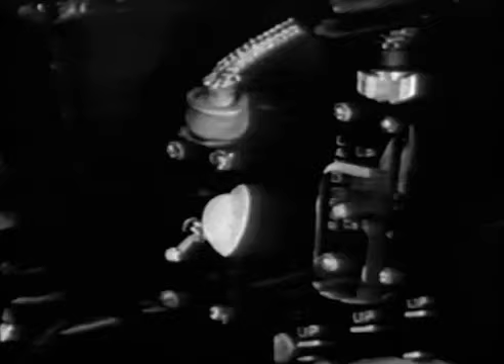The switches for all electrical equipment are on the left side of the instrument panel. Be sure the landing gear switch is not in the up position. Check the gun switches to be sure they're all off before turning on the main battery switch. It's on the right side of the switch panel, and the generator switch is just below it. You might try your flaps to be sure they're working properly.

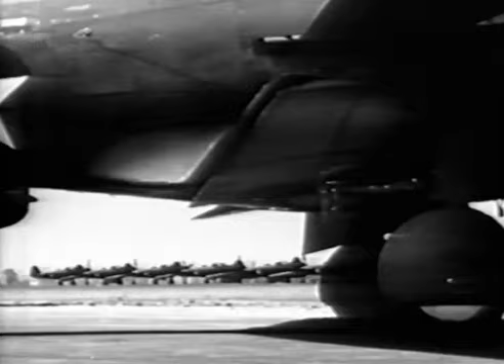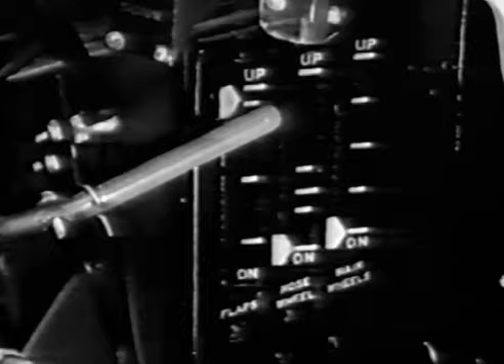The first of the 3 travel indicators is for your flaps. The other 2 are landing gear. Aside from being used in landing, the flaps can also be used to shorten your takeoff run on a small field. For this, 1/4 flap should be used. However, I don't recommend that you use flaps for takeoff until you're more familiar with the plane.

The propeller on this plane is an Aeroproducts propeller, which operates automatically. It changes pitch hydraulically by means of a cylinder in the propeller hub, and the only control is on the throttle quadrant.

Some P-39s are equipped with Curtiss electric propellers. For these, there is a governor control on the throttle quadrant, similar to the other. In addition, there's a safety switch and a switch for automatic control. If automatic operation fails, there are manual increase and decrease positions on this switch.

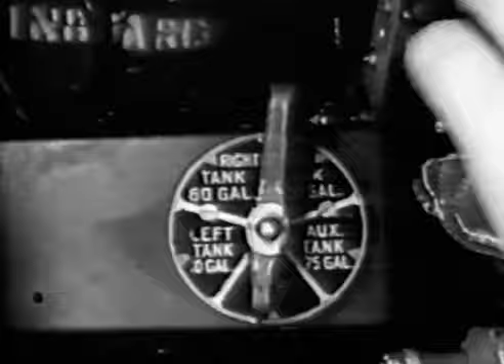When you turned on the battery, it energized the fuel transmitter. Remember always to check the fuel in your tanks. Down on your left is a fuel selector valve, which makes it possible to draw fuel from 4 lines, 3 actual tanks. For takeoff and landing, always use the reserve tank, which is part of the left wing tank.

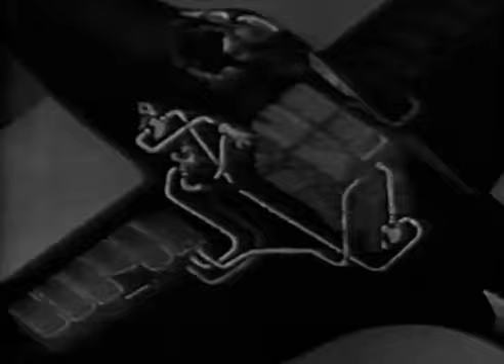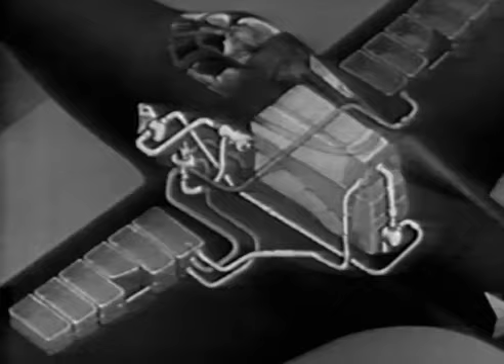In actual operation, the fuel is pumped from the tank to the selector valve, through which the fuel lines from all tanks pass. From the selector valve, the fuel flows to the strainer, where all foreign matter is filtered out. Then to the electrically driven booster pump, which replaces the old type wobble pump.

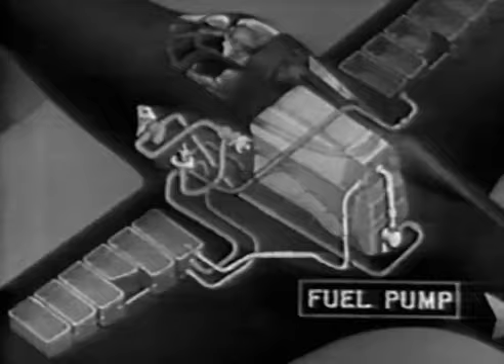It is used to pump fuel to the carburetor for starting the engine, at high altitudes to prevent vapor lock in event that proper fuel pressure cannot be maintained, or it can be used in case the engine-driven fuel pump fails. The fuel then goes to the engine-driven pump, which normally supplies sufficient pressure when the engine is in operation. From the fuel pump, the fuel continues on into the carburetor.

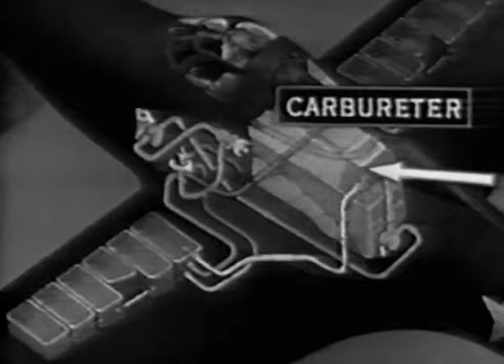In some models, there is a vapor eliminator system included here, and it is designed to overcome vapor lock. A red warning light on the instrument panel lights up when there is a drop in fuel pressure, such as is caused when a tank empties. There is a small tank unit in the system which can supply enough fuel to keep the engine going for 90 seconds until you have had time enough to change to another tank.

There is also a vapor return line through which vapor and excess raw gas from the carburetor flow back to the left tank at an appreciable rate.

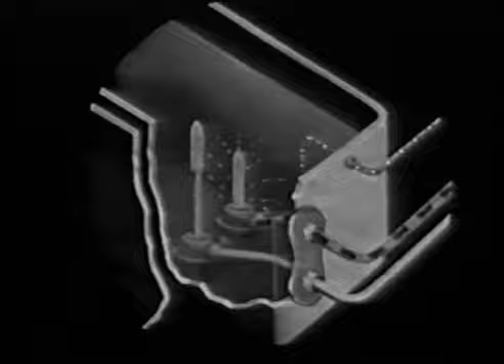The reserve tank is really part of the left wing tank. Here there are 2 finger screens at the head of the 2 fuel lines which flow from the tank. The tall finger screen is for the left wing tank, and through this line you can draw the 40 gallons which are above the standpipe. Below this, the remaining 20 gallons, or a full tank of 60 gallons, can be drawn through the lower finger screen, which is the reserve tank.

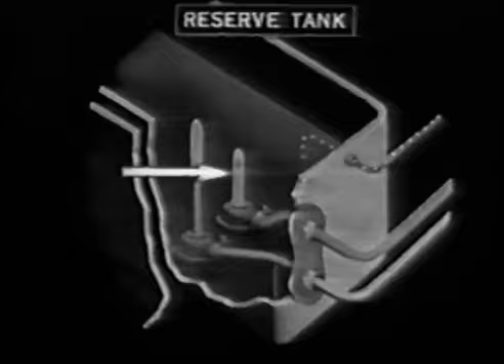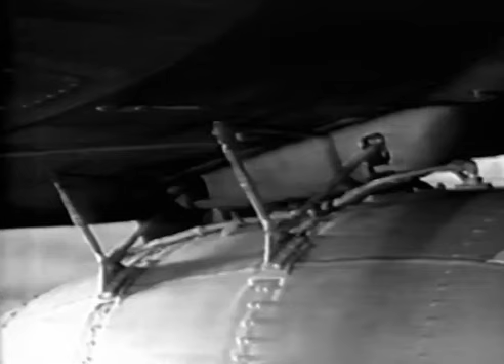For long-distance flying, these planes can be equipped with a belly tank, varying in fuel capacity from 75 gallons upwards. The tank is attached to the underside of the fuselage by means of sway braces, and it can be released during flight by pulling out on the bomb release handle in the cabin. With the fuel selector valve in the auxiliary tank position, fuel from this tank is drawn up into the selector valve and then through the same system that the fuel from the other tanks followed to the carburetor.

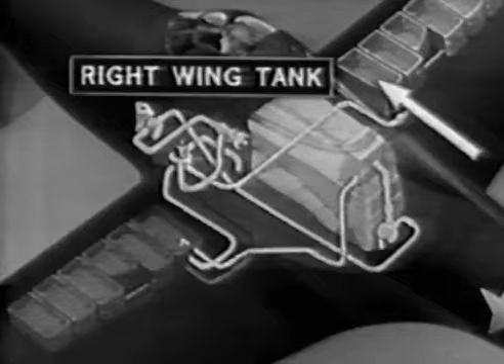When you change your selector valve to the right wing tank, you can draw 60 gallons. Just as in the other tanks, the fuel from here goes first through the selector valve and then through the rest of the system in the same way as did the others.

Back of the trim tab controls is a carburetor heat control, which you'll seldom have need for. Under extreme icing conditions, press the button to pull it out, and it will bring warm air from the engine compartment to the carburetor.

Well, now you've read all your pre-flight material and spent enough time in the cockpit to thoroughly familiarize yourself with all the controls and adjustments. Let's assume that you're taking her up for the first time. First, you'd set your fuel selector valve to the reserve tank, where with full tank you have 60 gallons.

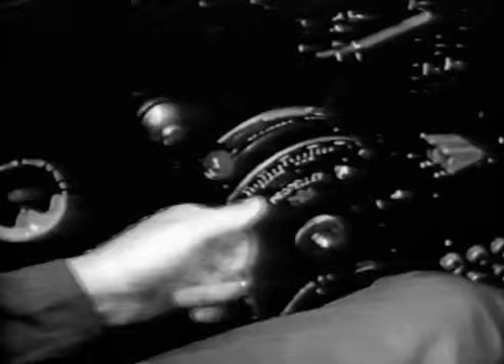Then on the throttle quadrant, be sure the mixture control is in idle cutoff. The prop governor is placed full forward to low pitch or high RPM, and the throttle is cracked open about 3/4 of an inch. On the side of the quadrant is a tension adjustment. Be sure you have a firm feel to all three of your controls to prevent them from creeping. Turn on the battery and generator.

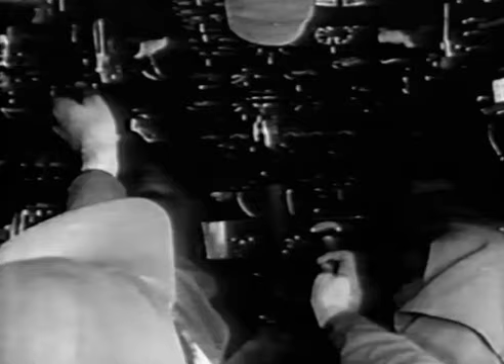Then, to prime the engine, first crack the primer. Turn on the booster pump. Then pull out the primer so that it fills. Turn off the pump and then push the primer in, locking it. In colder weather, you may have to do this 2 or 3 times. Then turn the ignition to both on.

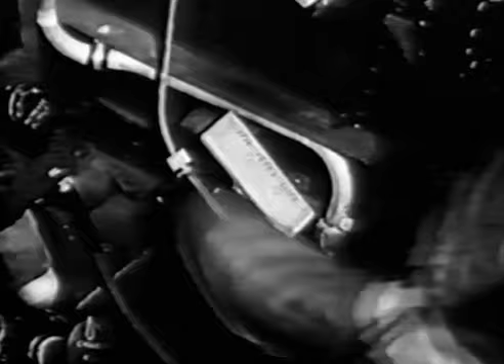The inertia starter pedal is down on the right side. Press it back to energize. During the energizing operation, turn on the booster pump, which will bring your fuel pressure to about 13.5 pounds. When sufficiently energized, check to see that your prop is clear before pressing forward to engage.

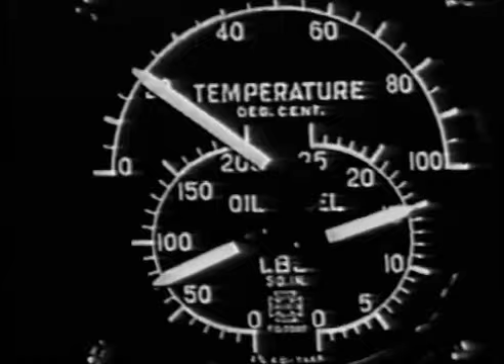As soon as it coughs and catches, move the mixture control to automatic rich. Then turn off the booster pump long enough to be sure the engine-driven pump is operating. Oil pressure should be above 50 pounds and the oil temperature around 30 degrees before takeoff. During warm-up, the coolant temperature will rise more rapidly than the oil.

On your right side are the controls for the coolant and oil shutters. Be sure they're open sufficiently. In warm weather like this, the coolant shutter should be opened all the way, while to keep the oil temperature even with the pressure, it need be opened only to the flush position. In colder weather, it would be almost fully closed.

If everything is in good order and she's idling all right, you're about ready to taxi out to the runway. After calling the tower, be sure your doors are shut and latched. You'll be more comfortable with the windows fully closed. In this type cockpit, it isn't necessary to wear goggles.

Then set your trim tabs. The recommended setting for the elevator is 3 or 4 graduations nose up, the rudder 4 graduations right rudder, and the aileron trim tabs 0 setting. Then release your brakes by depressing both brake pedals.

For taxiing, you'll find that the P-39 requires only a small amount of throttle, between 1,000 and 1,200 RPM. To turn in close quarters or at slow speeds, you can get full swivel action in the nose wheel by the use of the main wheel brakes, and you'll be able to turn almost in your own span. To prevent overheating, don't delay in getting out to takeoff position for a final engine check.

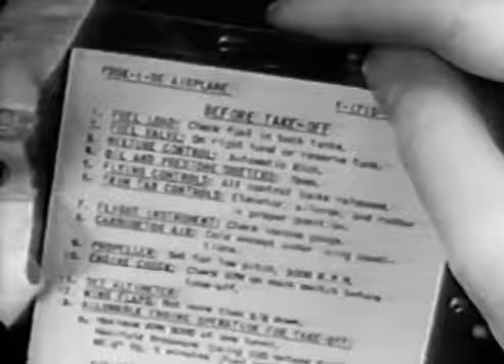Finally, to be sure that everything is in good order, there's a checklist provided on the instrument panel. Refer to it and go over everything once more. Are your fuel tanks full? Is the selector valve on reserve? Prop governor full forward and automatic rich on mixture.

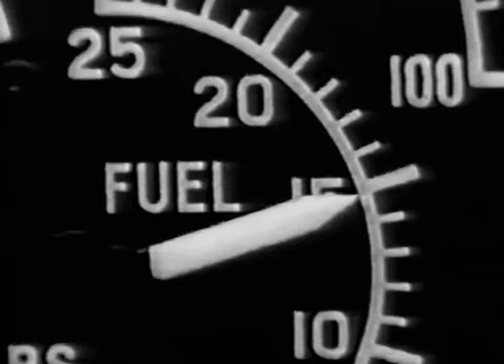Fuel pressure up to 14 to 15.5 pounds. Oil pressure up. Oil temperature okay. Coolant temperature okay. Suction up. And is your gearbox oil pressure okay?

Now you're all set. Look around to be sure you're in the clear and then open your throttle smoothly. Remember that you have a lot of power pulling this plane and there'll be a lot of torque, so use full right rudder. You should have 3,000 RPM and 45.5 inches of manifold pressure.

As you gather speed, it will feel like any conventional plane. However, avoid a long run. When you have sufficient speed, 100 miles per hour, pull back gently, and you'll lift off the ground quite suddenly. When you're safely off the ground, retract the landing gear. Keep an eye on the indicators to be sure they're coming up all right.

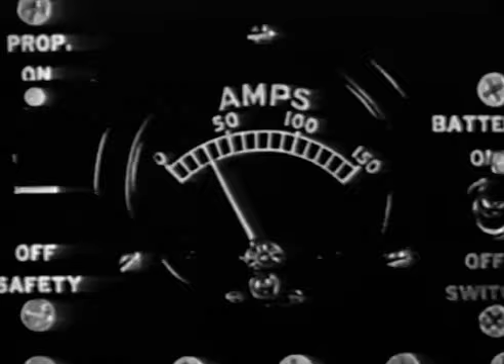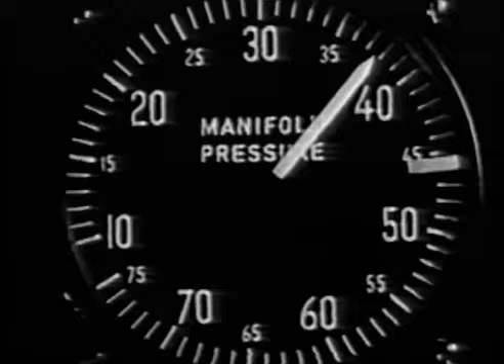When the wheels are fully retracted, the limit switches cut off the motor, and the ammeter should drop back to normal. The landing gear indicators will be fully up and you can turn the switch to neutral. When you're clear of all obstacles bordering the field and she feels all right, throttle back to normal climbing power, 37.5 inches of manifold pressure with the prop governor at 2600 RPM.

Your airspeed indicator should show about 160 miles per hour. No turns should be attempted at less than 150 miles per hour. As you change RPM and power and as your speed increases, you'll want to adjust your trim tab. During the climb, watch your operating temperature. At 160 miles per hour, your best climbing speed, cooling is the most critical. Be sure your coolant shutter is open sufficiently to keep the engine temperature down.

When you reach a safe altitude, level off. Throttle back to 30 inches of manifold pressure and pull the prop governor back to 2280 RPM. Depending on the temperature of the air, the coolant shutter should be adjusted for proper cooling of the engine. In extremely hot weather or in tropical climates, they should be kept pretty well open, somewhere between flush and full open. You'll find that the P-39 has excellent visibility in all directions, forward, rearward, above, and on either side.

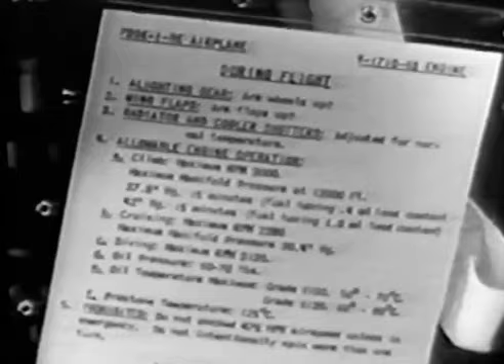Referring to the checklist once more, be sure that everything's functioning properly, that the fuel and oil pressures are up, and that the temperatures are right. Then, with everything operating smoothly, give some attention to the characteristics of your controls. You'll find that they're sensitive and respond nicely. Then try a few turns to see how she handles.

With the landing gear and flaps retracted, try a stall. Ease back gently on the stick, keeping the nose slightly above the horizon. You'll find that in this condition, the stalling speed is about 105 miles per hour. Ease the stick forward and be sure you build your airspeed up sufficiently to completely unstall your wing, at least 140 miles per hour before leveling off.

Then take it back up to a safe altitude again and try another stall. Only this time have the landing gear and flaps extended. It'll give you a good chance to study the plane's stalling characteristics and the landing condition before you bring her in for the first time.

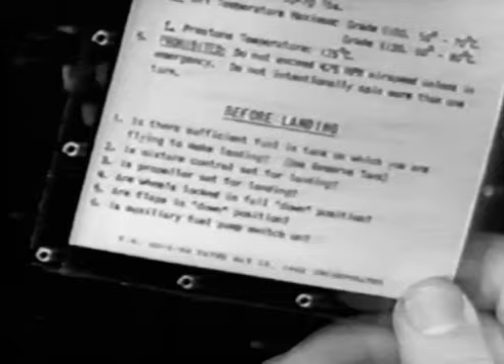You might refer to your checklist again. You'll find it helpful. Switch the fuel selector valve to the reserve or right tank, depending upon which one has the most fuel, and throttle back to about 15 inches of manifold pressure. Push the prop governor up to about 2,600 RPM.

When your airspeed has dropped to less than 200 miles per hour, the landing gear can be extended. Keep an eye on the indicators. When the wheels are fully extended, the pop-up indicator on the nose cowling and one in each wing panel will be visible. The travel indicator will be down and the ammeter should read normal.

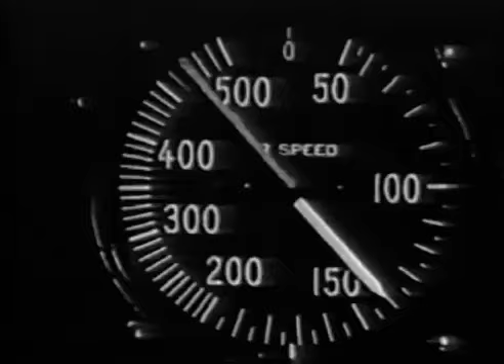In making your approach, you will find that with the P-39's excellent visibility in all directions, you will not have to make a close turn to keep track of other traffic in the air. You can come straight in if you want to. Keep your speed up sufficiently until you're beyond all obstacles bordering the airport. When your speed is about 140 miles per hour, lower the flaps.

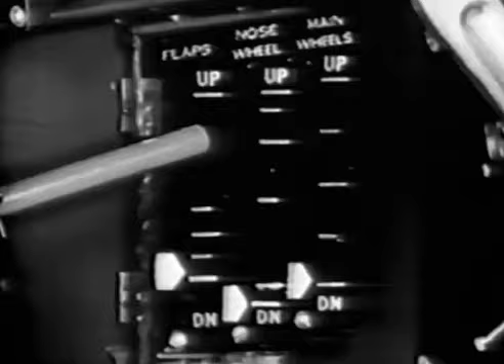Glance at the indicator to be sure the flaps are full down. Use your elevator trim tab to lighten the stick forces due to the change in trim with the gear and flaps extended.

Now remember, you'll be bringing this plane in for the first time. It's only natural that you won't be fully accustomed to it and perhaps a little uncertain. But don't forget your traffic regulations. Don't make a right turn instead of a left into the airport. Just take it easy and establish a steady glide. Be careful not to come in too fast.

If you're not quite straight with the runway and you find that you're not going to be able to set her down on the first third of the runway, don't be afraid to take her around again. It's much better and safer to make a good landing on the second or even the third try than to bring her in for a bad landing the first time. In going around again, don't forget your flaps.

On your next try, be careful to make a wide enough turn coming in so as not to crowd yourself. Get lined up with the runway early. Then you can concentrate on maintaining a proper approaching airspeed. Now your approach is steady and you're lined up with the runway, but you're still coming in a little too fast. You haven't broken your speed sufficiently to make a tail-low landing on the first third of the runway.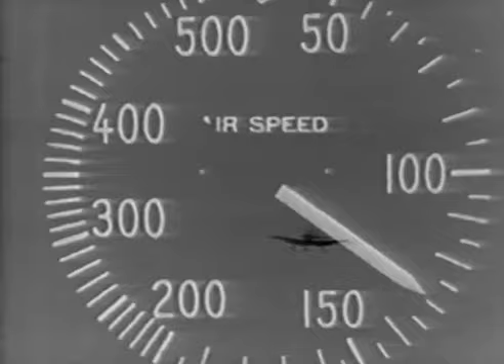Continue in a normal gliding approach and forget that you have a tricycle landing gear. Make a conventional tail-low landing. It's practically impossible to get your tail low enough to drag it on the runway. It's for this reason that a tail skid is not installed. In slow motion, your landing should look something like this.

You should contact the ground at about 95 miles per hour. Keep the stick well back and hold the nose wheel off the ground as long as possible. The plane will slow down quite rapidly in this attitude without the use of brakes. When you apply your brakes, the nose wheel will come down. There's absolutely no danger of nosing over no matter how hard you apply the brakes. However, the brakes are powerful enough to lock the main wheels and burn out a tire. Use them intermittently.

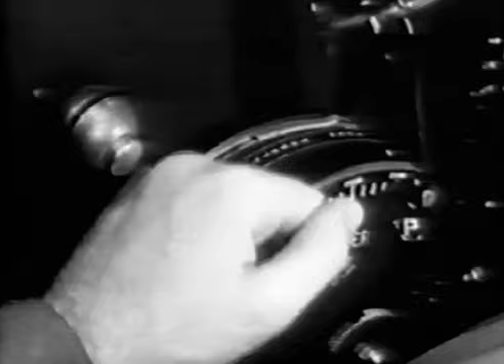When you taxi back from the runway, open your coolant shutters to keep the engine from overheating. Bring your flaps up, but remember the flaps, not your landing gear. Then bring her in and park her. To shut off the engine, pull the mixture control back to idle cutoff and advance your throttle slightly.

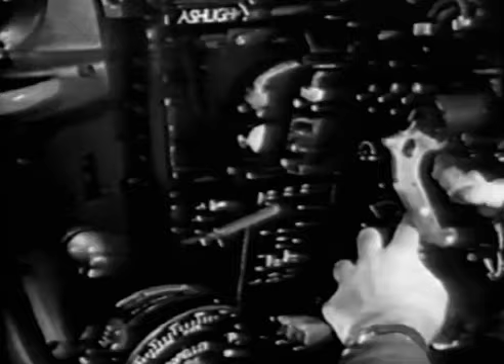When the engine is stopped, turn off your ignition switch, then your battery and generator switches. The flap and landing gear switches should be put in the neutral position. Then turn off your radio receiver and transmitter. Well, that's the story, Lieutenant. She's all yours.

Just remember, fellows, this plane handles much like any other. It's not a hot landing ship, but it is fast, and it may respond a little quicker than you're accustomed to. Just take it easy until you get the feel of the controls. You will find that you'll get along very well together. As a team, you and this plane have an important job to do in winning this war.